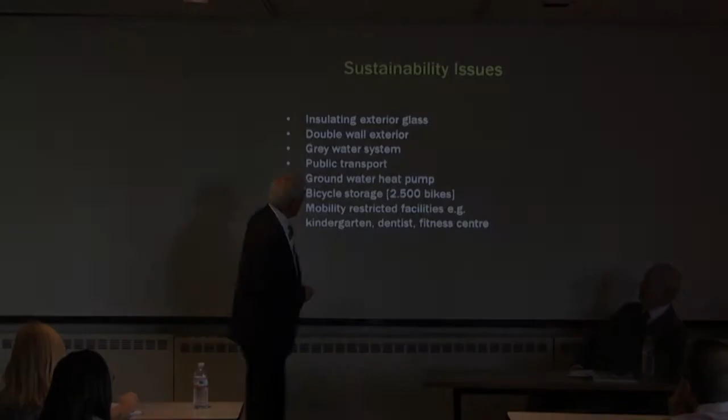Sustainability became very important. You know, in Europe, it's far more important than it's been here. One, because energy costs were much higher. And two, they've taken it more seriously sooner. But these are the things that were done. I'm just curious, if you were to arrange them in an order, how you would do it.

Insulating exterior glass, which is great. Double wall exterior, a gray water system, public transport, groundwater, bicycle storage, mobility, and kindergarten, dentist, fitness, everybody's there. You don't have to drive around to get to these things.

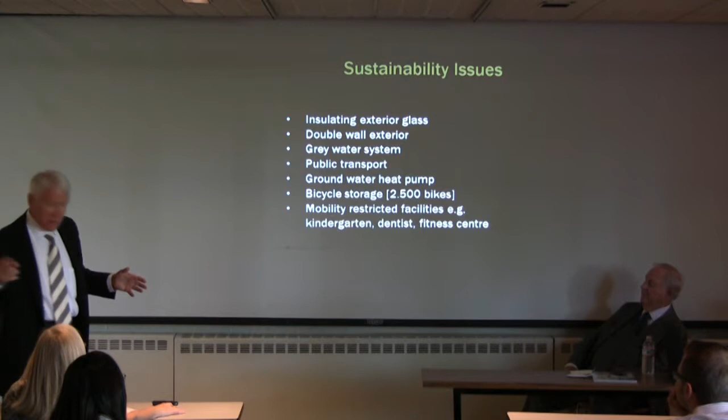Which one would you make first? Or are you happy with this list, everybody? Everybody happy with that? Or would some other thing be number one? Think about it from an energy point of view. Big, global kind of issue. Public transport. What might follow that? The mobility restricted facilities.

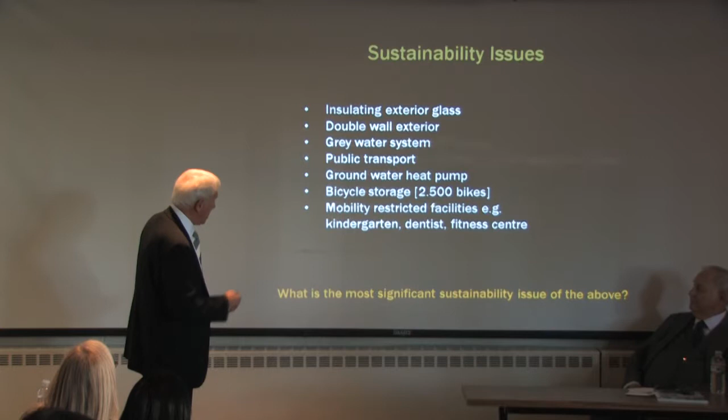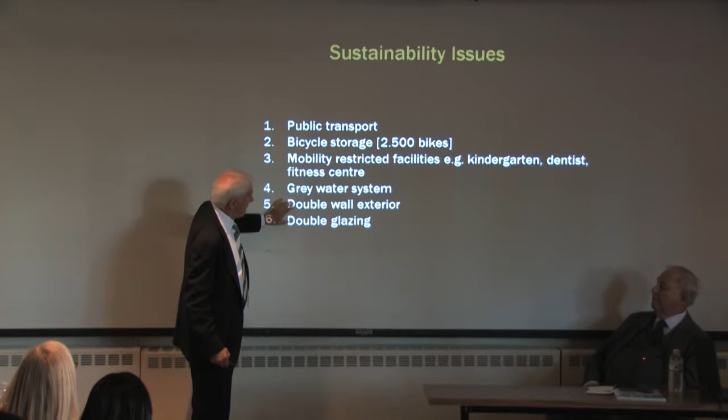Let's see, that's a question. Well, bicycle, these two deal with transportation, right? And then mobility, as you said. And then the rest, all important. These, while important, are less important, as you'll see in a moment. But these are big stories. Being able to reach this building by public transport or bike.

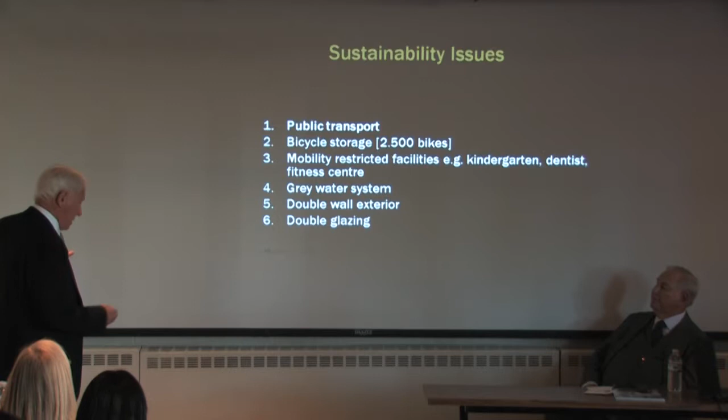When they added, I feel they've added several million square feet and didn't add one car park, but they did it all with bikes and public transport. Major, major issue. There's the bike storage. You come down below, and these are ramps up. You park the bikes down here. You can take a shower after you bike, get dressed, go up to your office, and come back down and get your bike and go home. All stored there for free, or a very nominal charge.

And let's talk about the double wall, the E-tower. All the new buildings began to get these double wall systems. You can see the interior wall and the exterior wall being added. This was the interior, exterior. Now in Europe, the double wall has been used a great deal. So it's like two walls with a space between. And that space gets insulated, and it does work.

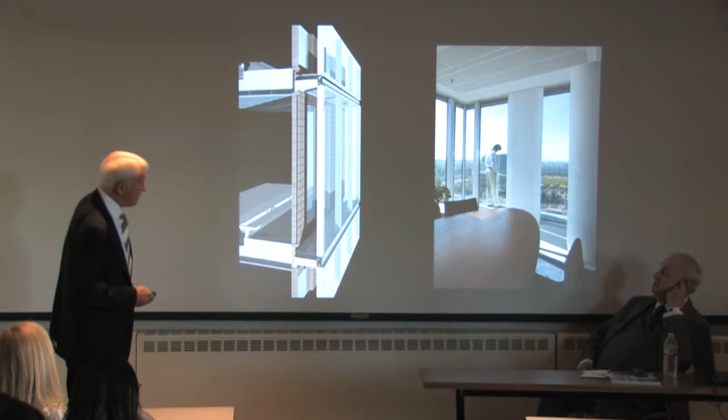You can cool it, you can take the heat out of these spaces, you know, it gathers heat. You can exhaust the cavity, the space between the glass. Very effective. And there you see some other sections of it. You can actually see this guy standing in the double wall at the moment.

And so, but would you have a double wall on all four sides? Because most buildings, when they did it, do. What would you do? You would not do it? No. Where would you put the double walls? Well, on the sides where it makes more sense to have it. Right. Normally in this hemisphere it would be what? Southwest. Southwest, right. Yeah. Northeast doesn't need it as much.

Yes, so when you see buildings, I mean, Piano's a great architect, I have great respect, but the New York Times building has the same sun control device on all four sides, which is a screen. The screen works effectively on the south, because it blocks the light this way. But it doesn't work with direct light from the east or west, and the north doesn't need it. Now, architecturally, it looks great to have it on all four. But the problem is you're spending a lot of money to build it. From an energy point of view, it's a complete waste.

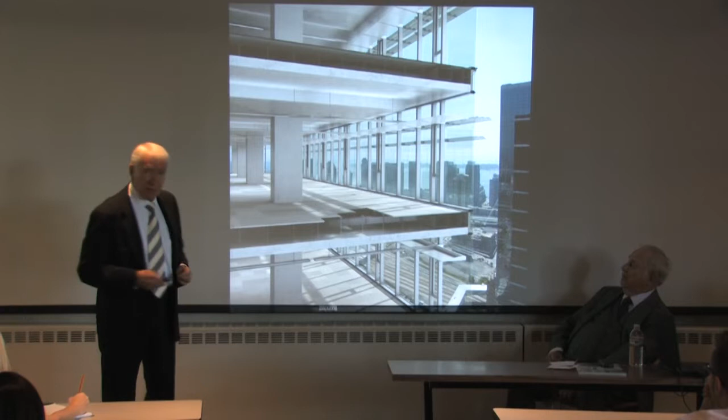So I think when you're talking about sustainability and energy devices, if it costs more to produce it than you're going to save on the building in terms of energy, then it doesn't make good sense. So these buildings now start to have the double wall on the south and the west, and the single walls on the north. We just did a building, I just want to show you this, in Toronto for the Royal Bank of Canada, which has all the devices now for good energy saving.

One, the air is distributed from the floor up. So if you're sitting here, we only have to cool you here. We don't have to cool up there. So you cool here, and as the body heats the air, it goes out and we exhaust it. So that works effectively. We have not only sun shades here, but we have light shelves on the inside to drive that light back further.

So there are all kinds of things, and then we just have a simple concrete slab for the ceiling we light off of. So here's one of those offices with the light shelves, and it makes a very glorious kind of space, and yet it's doing its job.

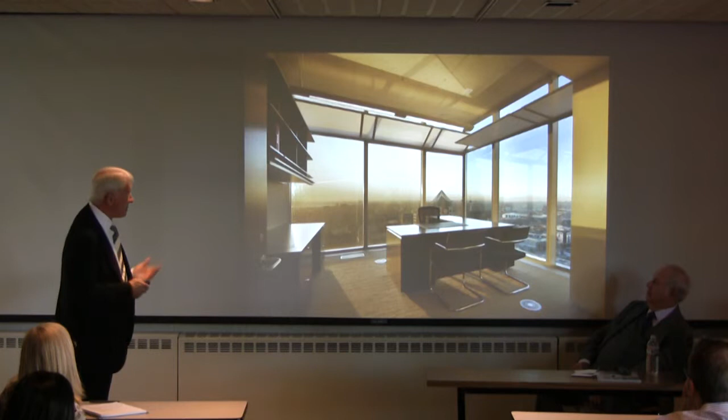So this was one of the new buildings in Holland, double wall. And the final, you can see this is all new. These are the new buildings, new building, and new. These are the reskinned. This is the new roof. Here's the train station. That train takes you to Amsterdam Center and the airport, Schiphol. Pretty darn good. And with your bikes, you can get around and enjoy the countryside.

So anyway, this kind of really worked quite well. And he became a hero. And after this project, he became a major developer in Holland. So he took a big risk. And I think to succeed in life, Al's taken great risk, we all have to. He took the risk because he believed it was the right approach, even though this roof could have killed him.

The cost of this was way over budget. We had to re-engineer it, redesign it in order to make it come in reasonably on budget. One of the biggest problems was all the expansion against the existing buildings, how you deal with that. And so we had to redesign the structure, but all worked out, and today it's a spectacular, fully leased, totally successful project.

So in summary on this, I think architecturally you would say, I hope you would, that the new buildings are quite handsome. The renovated ones are quite good because we're working with what we had. And two, we create a great sense of place. It's very environmentally friendly, deals effectively with transportation, and works as a great center for people to mix and shop and do every kind of thing, and using the bike effectively. So, all in all, very successful.

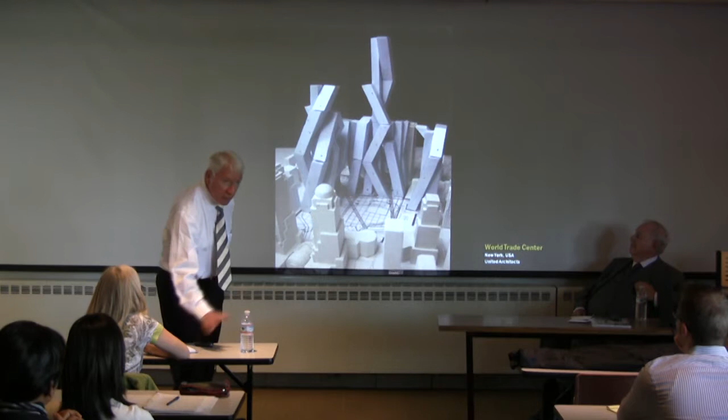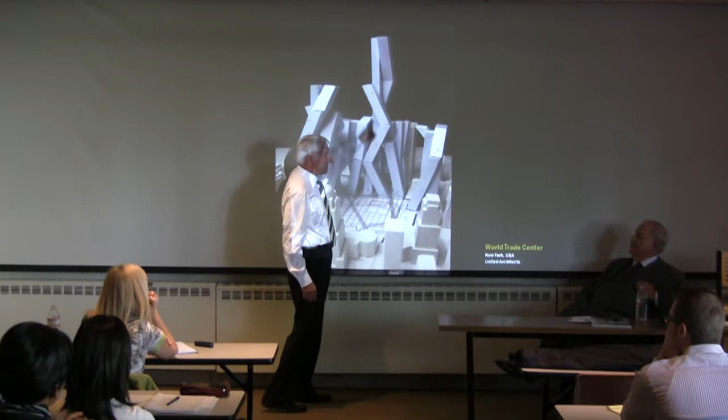Okay, right after 9/11, they held a competition, you may be aware, for buildings to replace the World Trade Tower. What happened to the World Trade Tower? Does anybody know? Of course you know. Tell me what happened. Collapsed. They collapsed, right? Now, would you propose building a building that looked like it was going to collapse to replace it? I'm serious. The emotion of the people who were around, if you were in New York that day, and you saw people jumping out of the building, if you saw those buildings come down and you could not believe it, you would not propose, I don't think, anything that looked like it was going to fall. Because I wouldn't want to be there, right?

So this was the beginning of this idea that icons and sculpture had to take different shapes than just be vertical. This one, being proposed for the Mideast, I talked to the architect, I won't mention who it is. I said, well, tell me, how does the core work? He said, well, we didn't take it into account. Think about that. The core, you know, with elevators. Think about that, okay?

You need to tell us who that is. Huh? I think we want to know who's the architect. I can't tell. No?

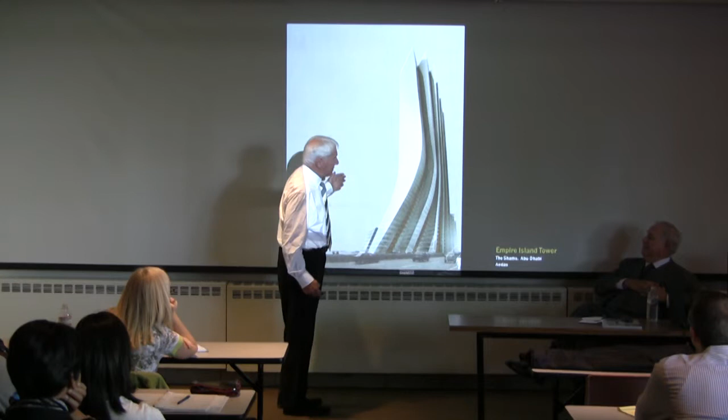This one, maybe the architect, it's called the Shams. Now, in Abu Dhabi, Aedas is the architect. They were the ones, the previous one too. This looks like a heavy wind just came, right? It took a curtain and pushed it. But why would you do that to a building? I mean, what does it really do that makes it great? Unless you just like the form, I guess.

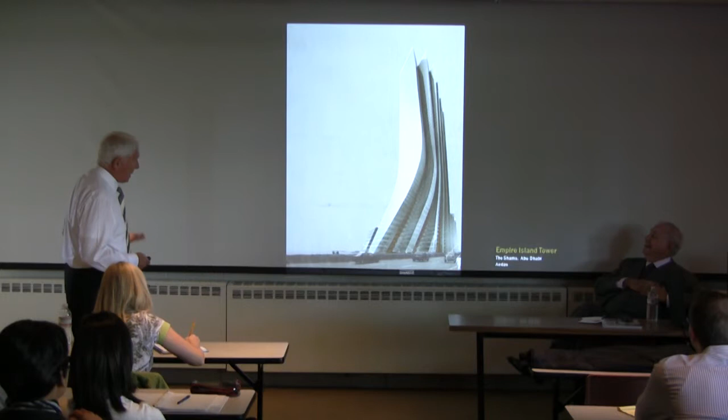This one really gets me. It's like a bunch of snakes coming up, you know? And this is actually being proposed by a very good firm. I have a hard time with this one. I'd hate to fall on top of it. But there it is, okay? Actually being proposed. How do you lease those floors at the top? I guess you just lease two-thirds of it and let the rest sit.

But why would you want to torture this building? I mean, I don't know. What'd you do with the core? It actually runs outside the building. Can you make some elevators go like that? Well, you can actually. Yeah, I know. It's a little expensive. Why would you do this to a building? If somebody doesn't agree, please don't argue with me. That's okay. I happen to think you shouldn't do that to architecture.

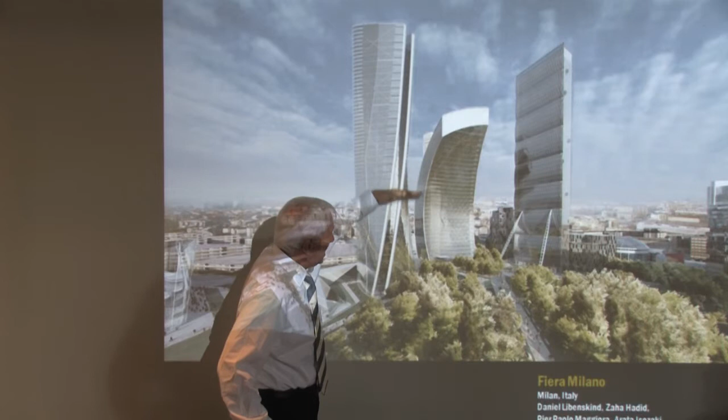Just think about this floor. You're on one of these floors, right? Just think what this glass is doing in front of you, falling away. Are you going to feel pretty secure walking up to that window? Or are you going to feel good about being on the other side where the glass is coming right up over your head? I don't think so. And I wasn't sure whether the floors tilt like that. Why would you do this to a piece of architecture and to a structure? I don't think you should, but obviously Daniel and Zaha Hadid did.

This is actually being built now in Milan. And each one of these kind of looked like it got shook up by an earthquake. Again, I don't know that makes it, well, maybe it makes it better visually. I don't know. Do you think? Anybody agree with that? I'm not grading you, so it's okay. Isn't the key what it's really like to live and work there and to walk around these things? I am not endorsing the shapes.

I have to agree with you. It seems to me that we live so close together like this in this room. I'd like to see what a classroom in a building like that would be. You've got to be able to do all those same things people have always done for thousands of years. Exactly. I can see where it's aesthetic, it's composition, there's movement, energy. I can make a whole speech why it's good. But I don't honestly believe that's right to do that to buildings.

Anyway, so I thought, the Leaning Tower must be the inspiration. It's leaning, and everybody goes to see the Leaning Tower, and they love it. Some people hold it up, and others go up. But you know what? It wasn't designed to do that. I went too fast. That's not what it was designed and built to do. The fact that it's leaning is not basically in the best interest of the tower. But there it is. So now everybody thinks they should build leaning towers.

I love this cartoon. You may not be able to see it. He's saying, sir, the architect said he wanted our new building to make a statement. That's the new building. And then this guy says, then permit me to make a statement. Call Greenberg Glusker, they're lawyers. So, anyway.